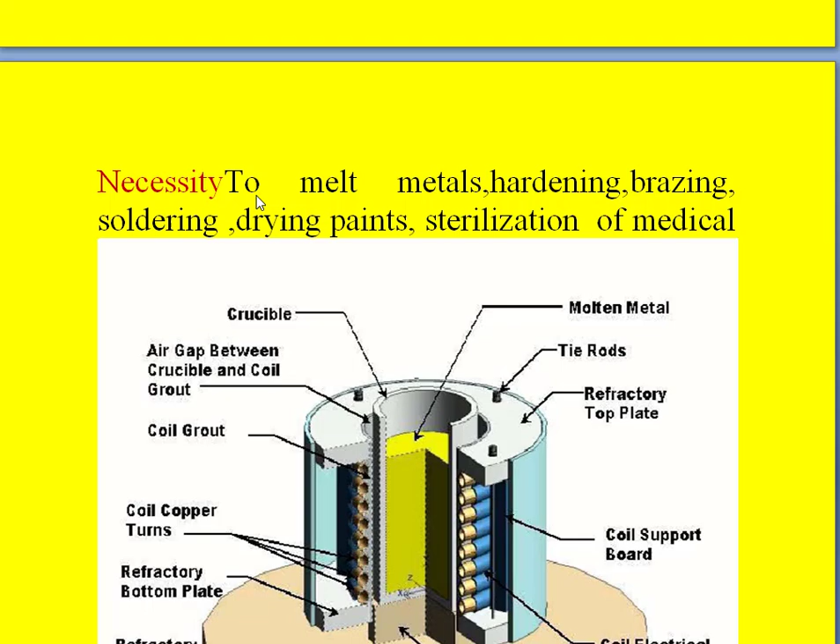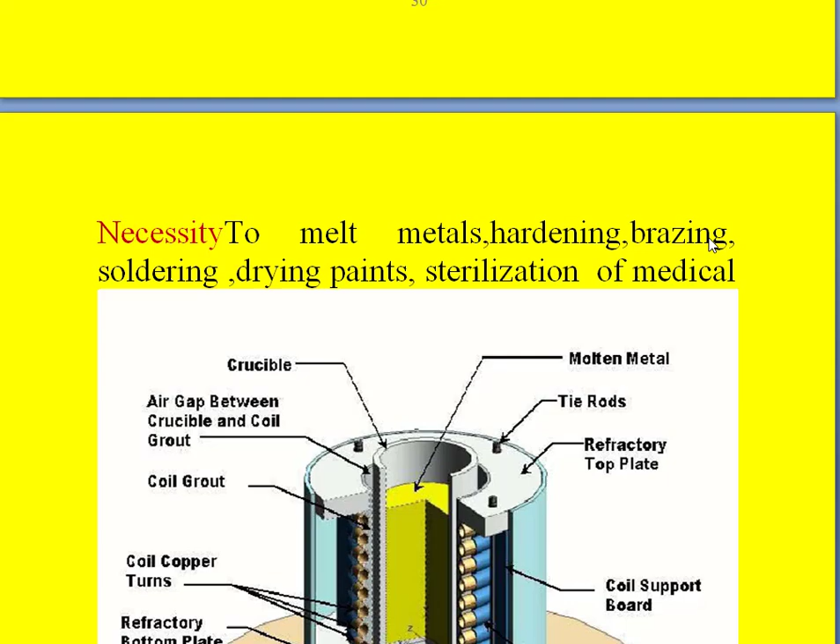First let me cover the necessity of this induction furnace. It is necessary for melting metals, hardening metals, brazing, soldering, drying paints, and sterilization of medical instruments. These are some of the important works done using this furnace.

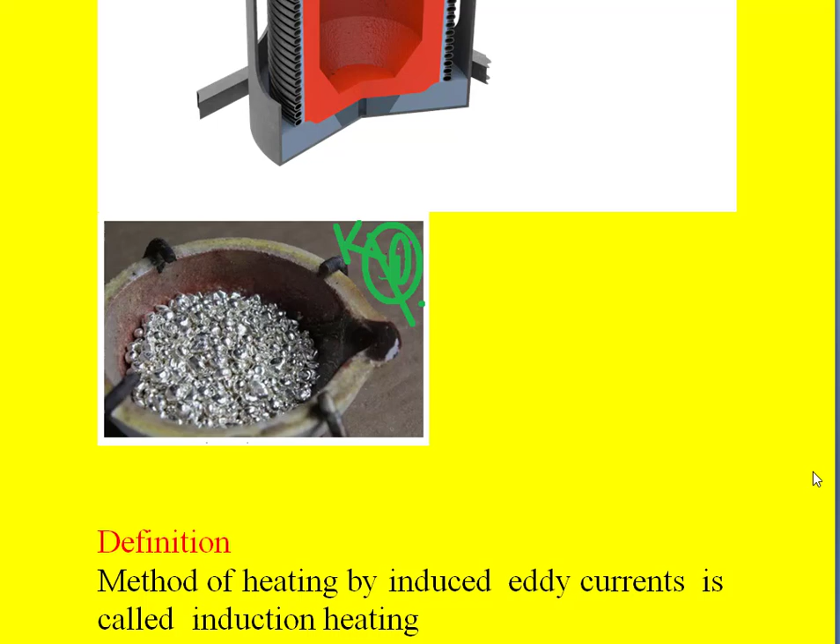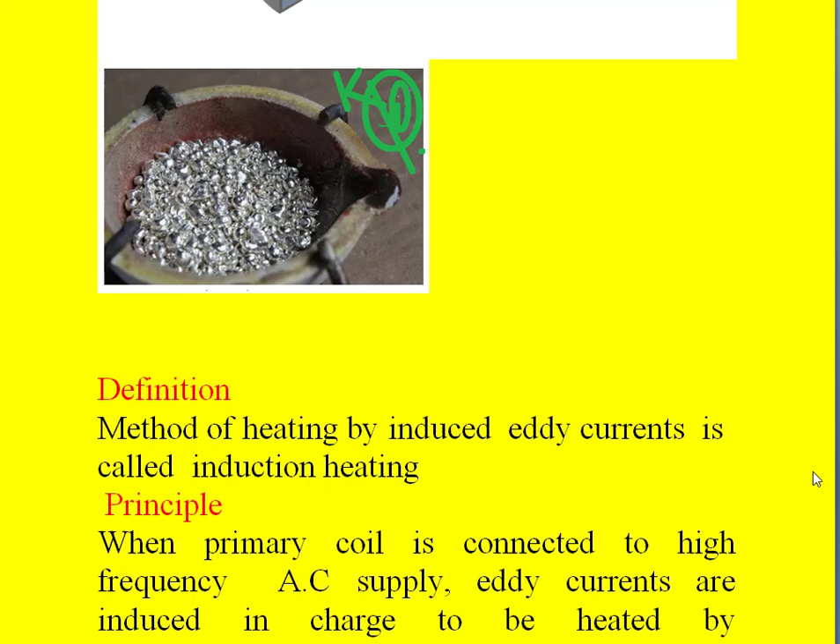Coming to the definition, it is nothing but the method of heating by induced currents in the metal to be heated, called induction heating. Coming to the principle, when the primary coil is connected to a high frequency AC supply, eddy currents are induced in the charge to be heated by electromagnetic induction.

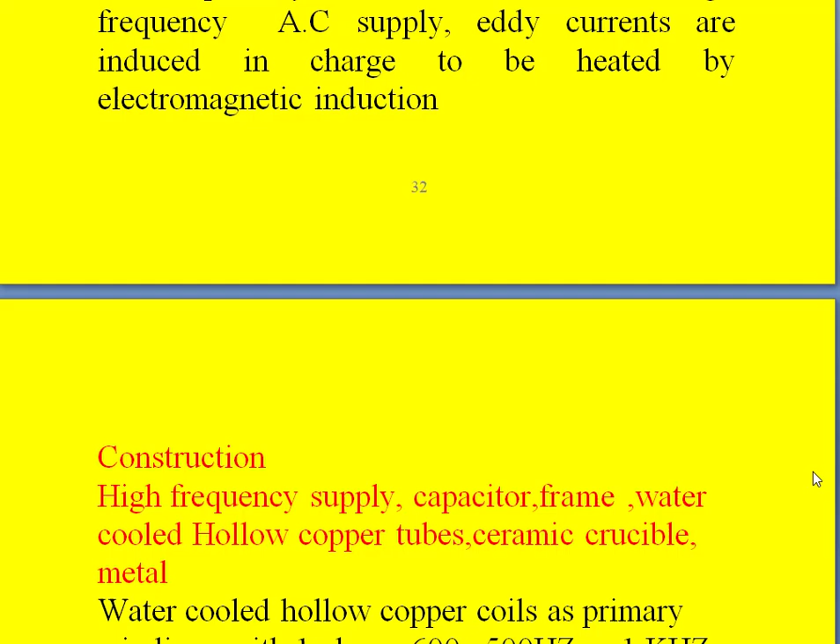Coming to the construction, this consists of a high frequency AC supply, a capacitor across the supply to improve the power factor from 0.2 to higher values, and a frame to accommodate the water cooled hollow copper tubes which act as the primary winding, along with a ceramic crucible in which the metal to be heated is placed.

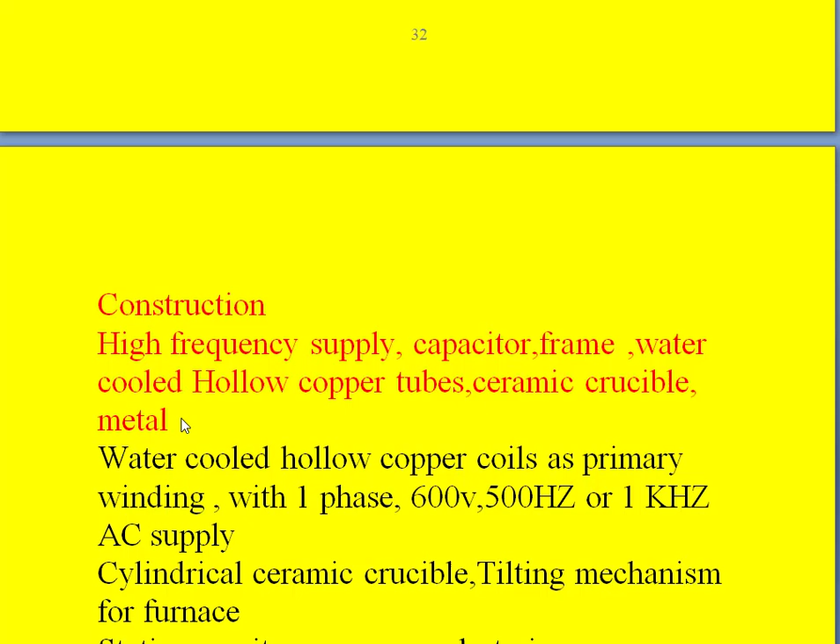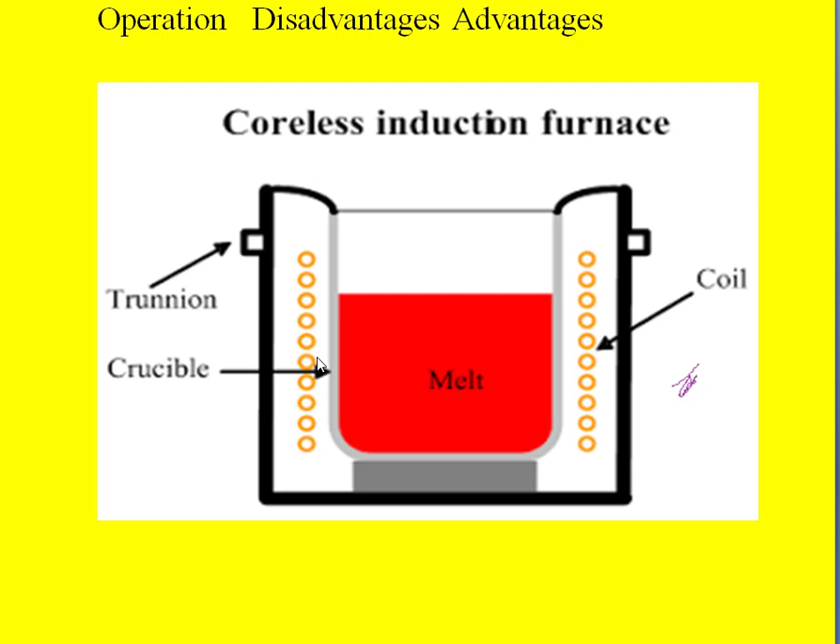When we see this diagram, you can find there is a trunnion. This is the ceramic crucible. These are the copper tubes or coils which carry the water to get cooled, and this is the frame which supports these water cooled copper coils or tubes.

Further we can see here, this is the ceramic crucible, and this is the molten metal which is kept in the crucible. This is the tie rods, and this is the refractory top plate. The coil and grout are the primary windings, that is the copper tubes carrying the cool water to get cooled, and this is the refractory bottom plate for support.

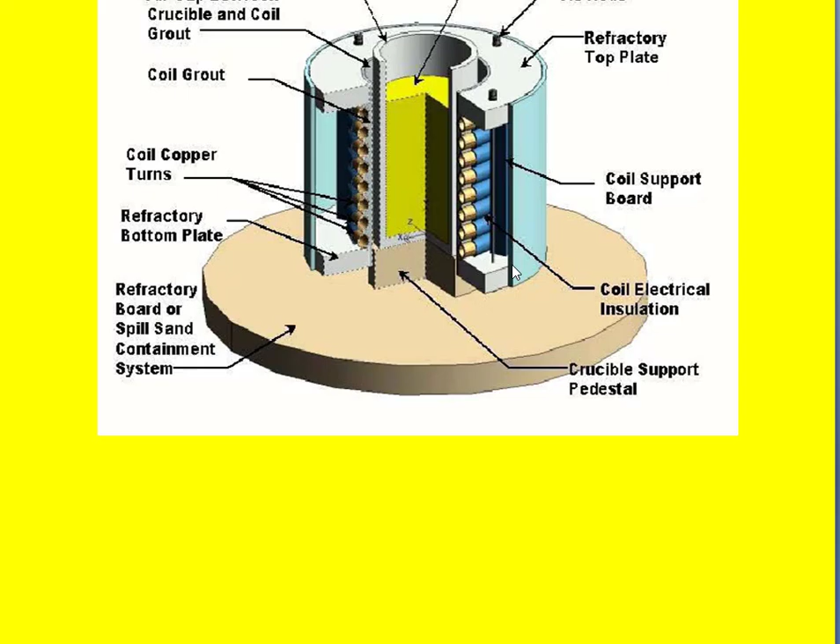This is the electrical insulation, coil electrical insulation. Next, the crucible support pedestal, that is this. This is the arrangement to tilt the furnace to get the molten metal out of it. This is the refractory top plate on the furnace. This is the crucible which carries the charge, or the metal to be heated.

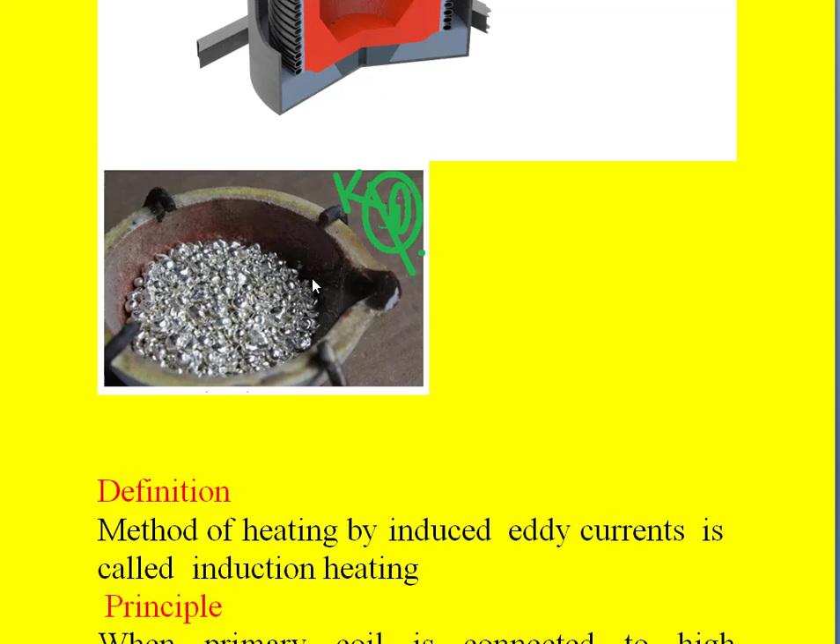If you want to see, here is the scrap metal to be heated, and this is the ceramic crucible in cylindrical form. This is what we find here, a cross section. It will be like this, and this is the portion where we keep it.

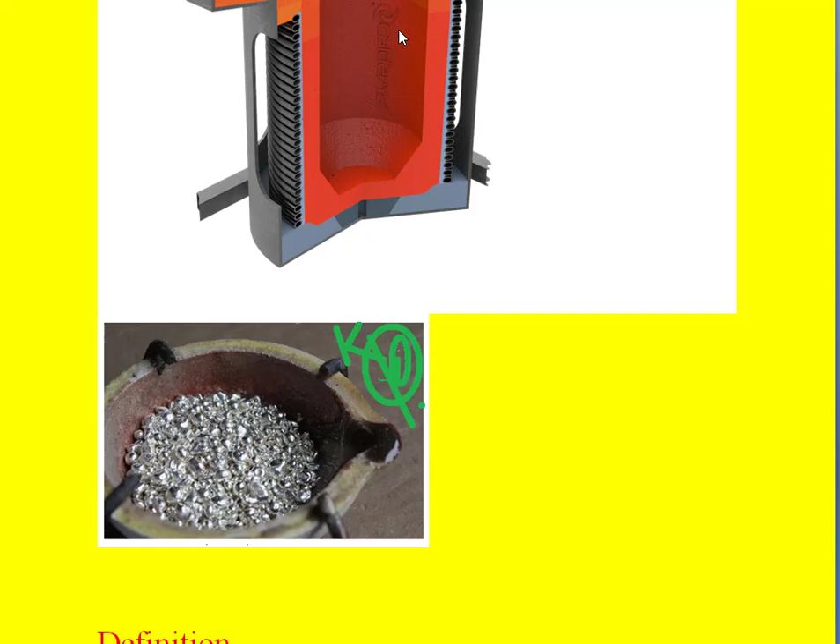Coming to its operation, when a high frequency AC supply, approximately 600 volts, 1 kilohertz, is given to the primary winding, a flux is produced by the primary current flowing in the primary circuit, and that flux links with the metal.

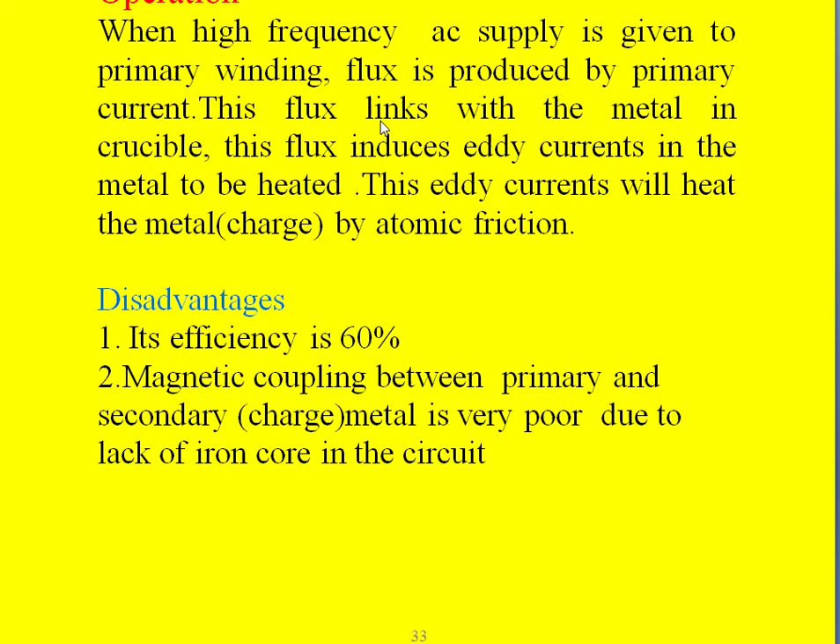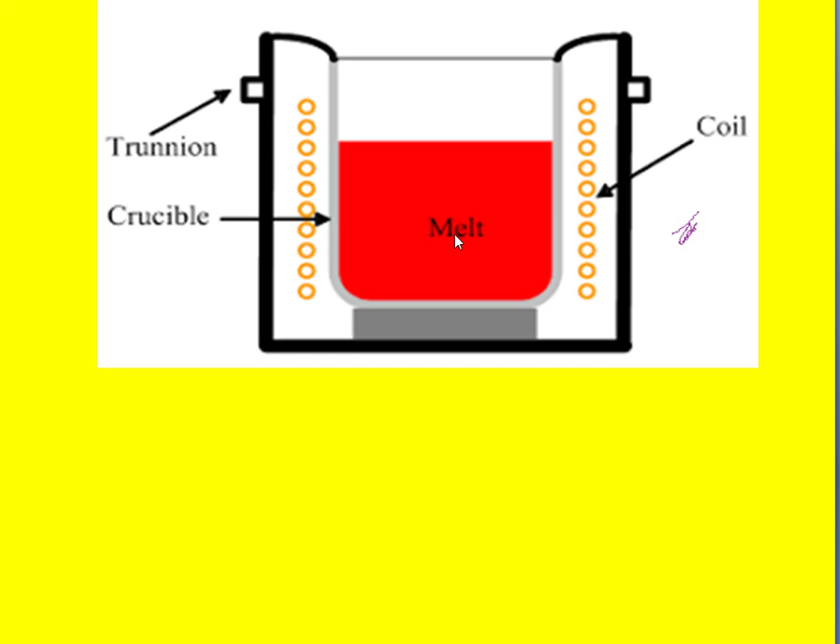Once the supply is given to this primary coil, that is the copper tubes carrying the cool water, the current that flows through this coil will produce a flux, and that flux links with the metal placed in the ceramic crucible. This flux linking with the metal induces eddy currents in it, and as a result, uniform stirring occurs, so they get melted.

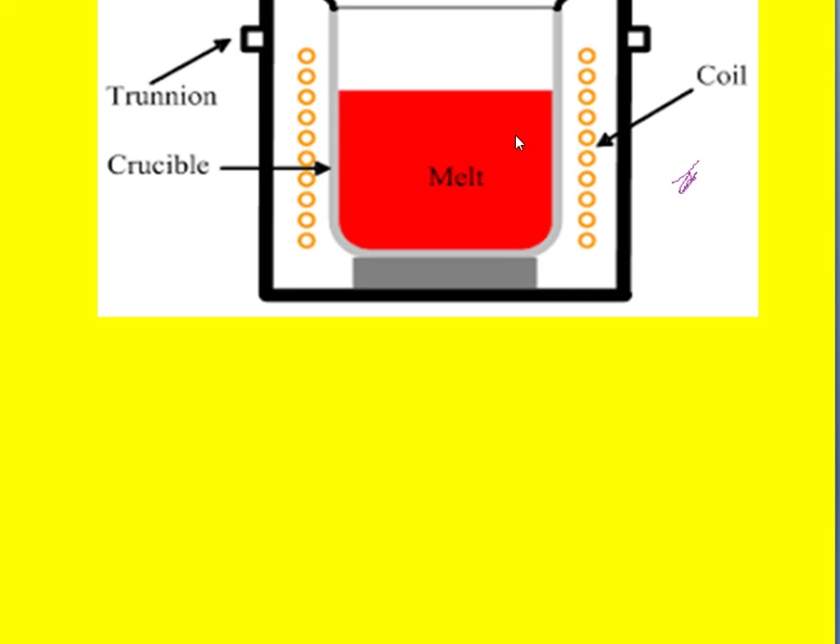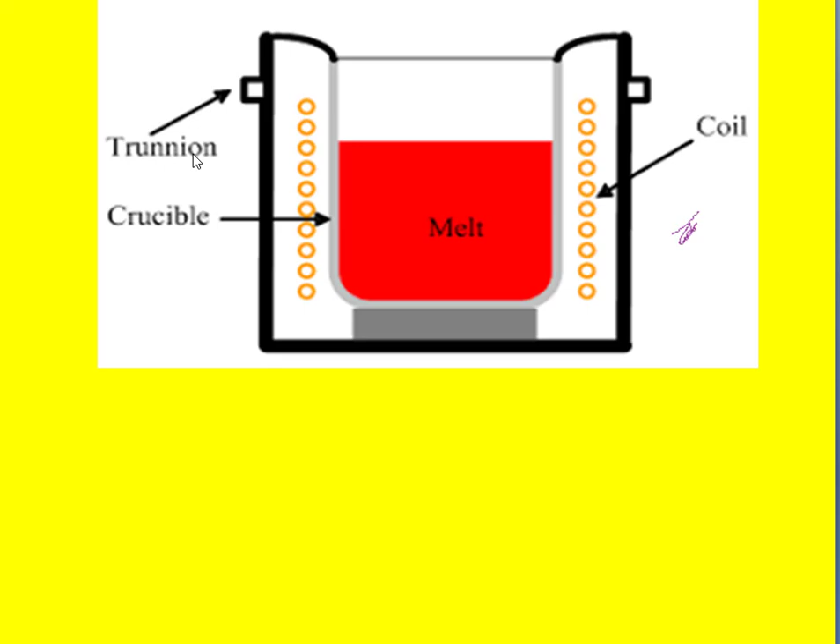Once the metal is melted, it can be poured or taken out using the lever arrangement, that is the trunnion. This is the arrangement, this is the lever arrangement, meaning handles. By tilting to the left side, we can get the metal which is melted in this.

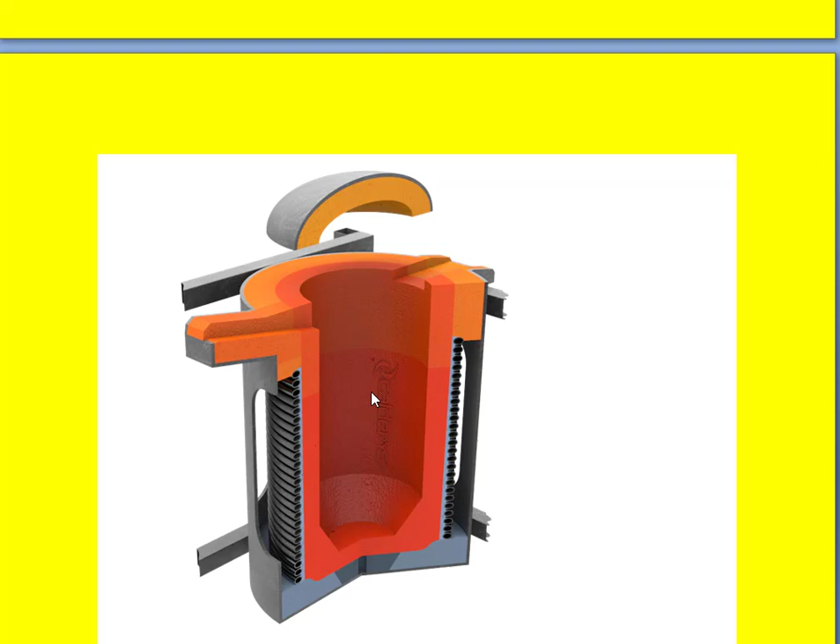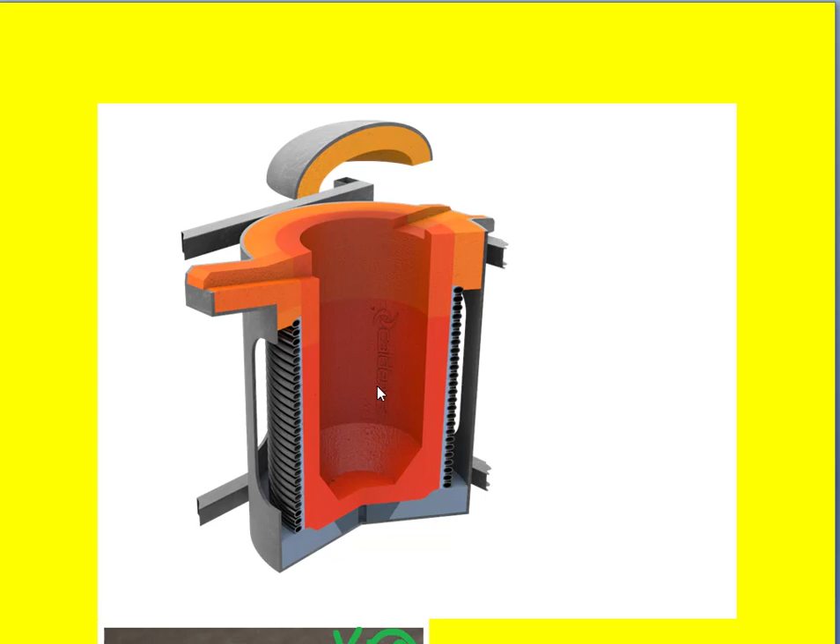Coming to the application, this type of coreless induction furnace can be used for melting ferrous metals and also non-ferrous metals, which is a major advantage. Another advantage is that its cost is very low because the core is missing.

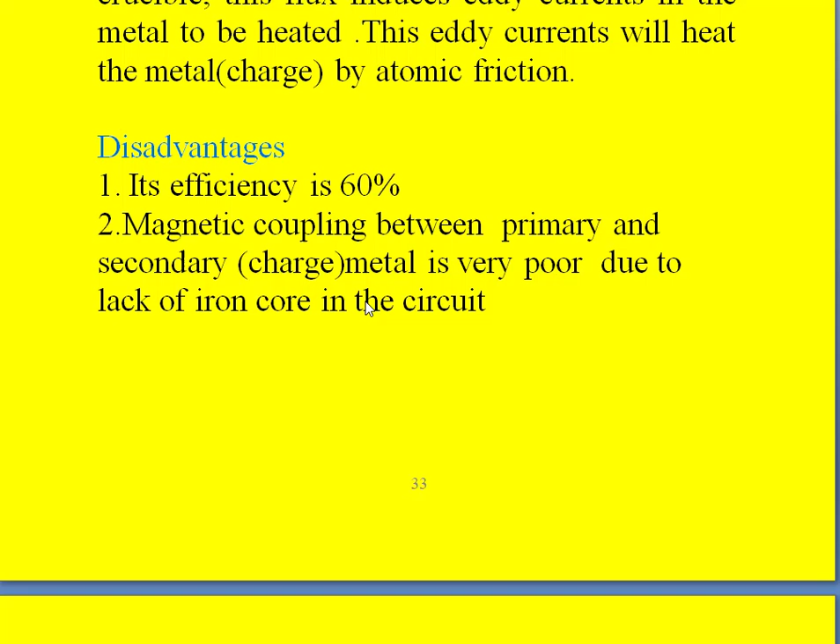Coming to its disadvantages, its efficiency is only 60%, and the magnetic coupling between the primary and secondary - secondary being the charge to be melted, kept in the ceramic crucible - is very low. This is mainly due to the lack of an iron core between the primary and secondary windings.

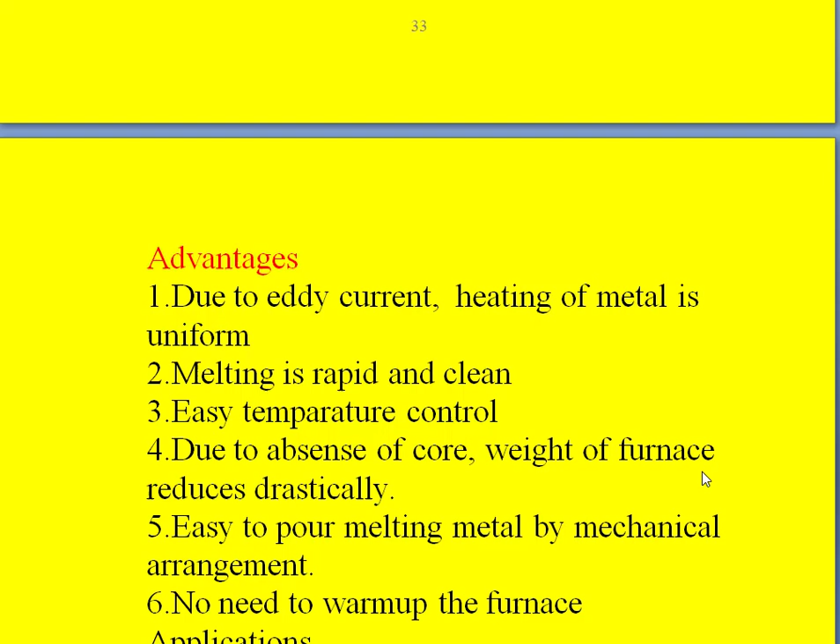Coming to the other advantages, the melting of the metal is very fast and also clean, and the metal heating is uniform because of the eddy currents induced, making temperature control easy. Due to the absence of core, the weight of the furnace also reduces drastically, and it is easy to pour the melted metal by mechanical arrangement. Another advantage is that there is no need to warm up the furnace.

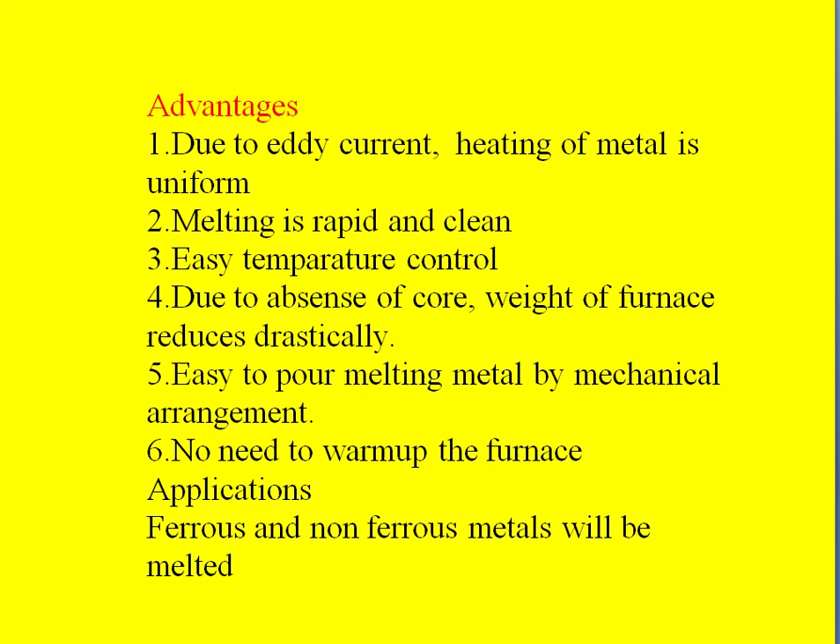So let me summarize. A coreless induction furnace will not have any iron core between the primary winding and the secondary winding. The primary winding is nothing but water cooled copper tubes called the primary coil, connected to a single phase AC supply with high frequency, normally 600 volts and 1 kilohertz. Once that supply is given, current flows through these copper coils, and once the current flows through it, a flux is produced by this current.

Once the flux is produced, it links with the metal to be heated in the crucible, and that flux induces eddy currents in this metal. Once the eddy currents are induced, heat is produced. Because of that heat, the metal is melted, and that melting is uniform because of the eddy currents induced in the metal. Once it is melted, using the mechanical arrangement, we can pour it into a separate cylinder from this furnace.